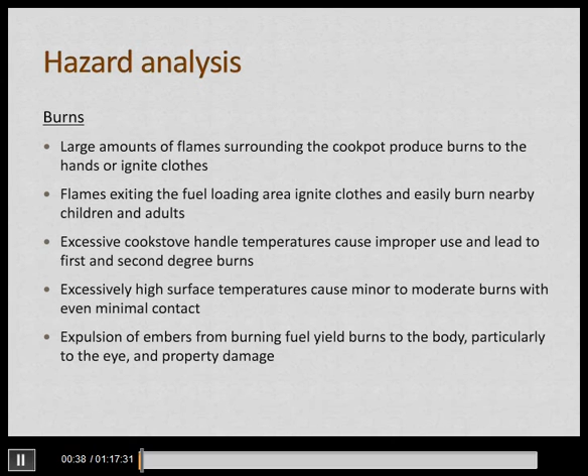And on the next one, scalds. The first one is if there are handles or protrusions around the cooking surface that stick up. If you pick up the pot and go to move it, it hits those little ledges, and then you spill the pot, possibly on yourself or someone near.

Also quite obvious is the second one under scalds, which is that stoves have to maintain stability. If they're not stable, it could spill out fuel, which leads to some of the loss of property as well.

I'll skip down to loss of property for a moment. Looking at large amounts of heat transfer to surroundings, in some situations if the stove is placed too close to the wall, or if there's a heating unit that starts the fuel before you put it into the actual cooking stove, it can ignite the surrounding combustibles or the home.

Not that uncommon, actually. I had a family member, even in the United States, who lost their home from a wood-burning stove inside, fully enclosed, but the stove was so hot it ignited the dry wood in the floor underneath. Two hours later, the entire house was gone. So this is not an uncommon problem, and we really need to look for that.

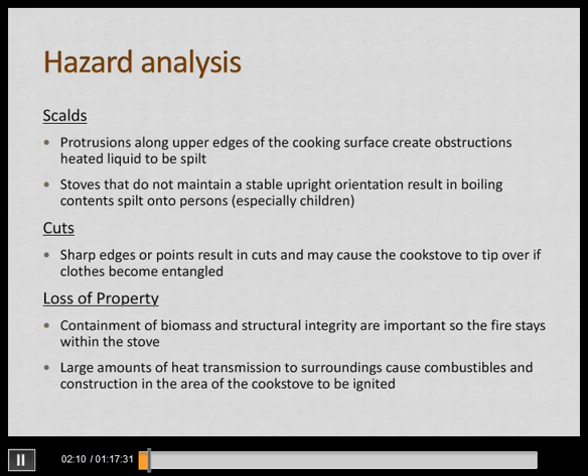The other one, in terms of cuts, is sharp edges or points that can cause lacerations or cuts. If clothing catches on those sharp edges, it can easily tip the cook stove over.

After looking at these hazards, I wanted to see how the available standards represent them. We reviewed standards from a few different organizations, and the ones presented on the right—ISO, ANSI, and Underwriters Laboratories—are the ones I focused on mainly when developing the set of 10 safety guidelines and metrics I'll talk about today. But this is the set.

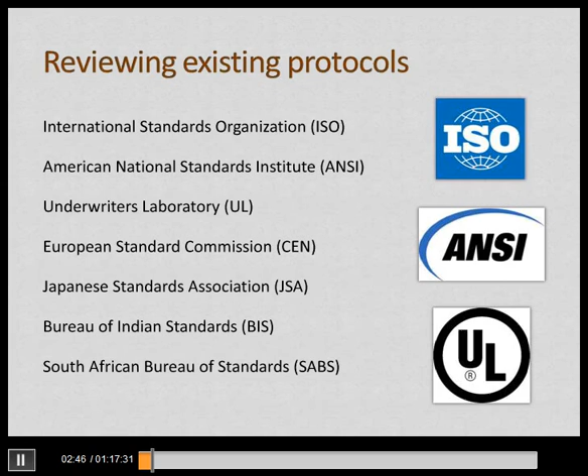If you want to look at the larger set of what I looked through, I don't expect everyone to be able to read this, but feel free to take a screen capture, as Rainey mentioned it's going to be online later with a recording. These are 30 different stove safety protocols, or protocols on stoves that have safety included. A lot of them also have durability, because those two considerations often go hand in hand when developing protocols.

If I was doing this in 2004, there are many of these. I updated this last time about 2 years ago, and these 4 right here have been updated since then, these 3 as well, these 2, and going on up. A lot of these have been developed, and you'd expect that with the safety protocol I'll talk about today.

Then Rainey will have some questions about the way forward. Is there anything missing? Should we have testing equipment kits that we can send people, etc.? That's kind of one of the ways forward.

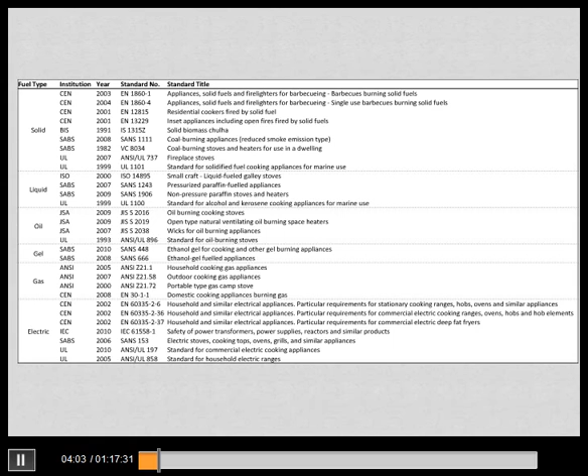So that'd be perfect. Let's get on to the actual safety procedures that I developed. Why tiers? Why are we not just saying a stove is safe or a stove isn't safe? Like I was mentioning earlier...

Let's see, I'm going to show presenters my cursor.

Thanks, Laura. So what we see is that the incremental rating system is good for showing improvement.

But then there's also the all-or-none approach - if we don't have an organization saying this needs to happen at this level or you're not allowed to sell stoves, there's nothing like that in many countries. So that's another reason for the tiers - so people can say, well, my stove is at a fair rating, and a consumer sees a stove right next to it at a good rating, and thinks, if it's safer, it's probably good to purchase, good to fund, and a better design. So this is one of the reasons to go there.

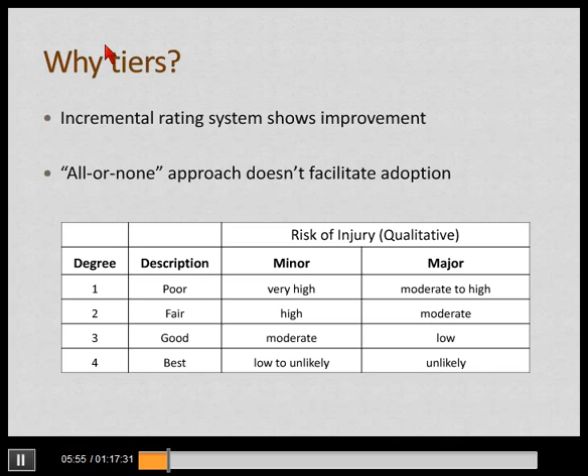At this time, and still today, there's very little data on the likelihood or risk of injury. So 10 years ago we talked about looking at this qualitatively, and that's what I did. If I looked at the possibility of a minor injury versus a major injury, this is how it ranked. For a minor injury, a poor rating would be if it was very likely to occur, like a small cut on your hand. But for a major injury, such as what would happen from a skirt fire, even a moderate chance of that happening is very bad, so that gives a poor rating. You can see how that goes down to the best rating. Many of the procedures I'll show you in the next several slides use these four ratings.

In establishing the tiers, there are a couple things to consider. First, we need a reference point - where do we put the line in the sand and work from there? The line in the sand we chose was the ANSI standard. That was identified and proposed to Ethos, and everyone agreed it was a good idea to move forward with.

The ANSI standard is used as a reference point, placed between the good and best ratings. It's not placed at the top of the best rating because there isn't really a maximum amount of safety you can have. What's available is the American National Standards Institute's minimum safety standards, which correspond to the same metrics as other standards throughout the world. If everyone agrees on that, it makes sense to put the peg there and work up and down from it, developing those through collaborative discussion with stove community experts.

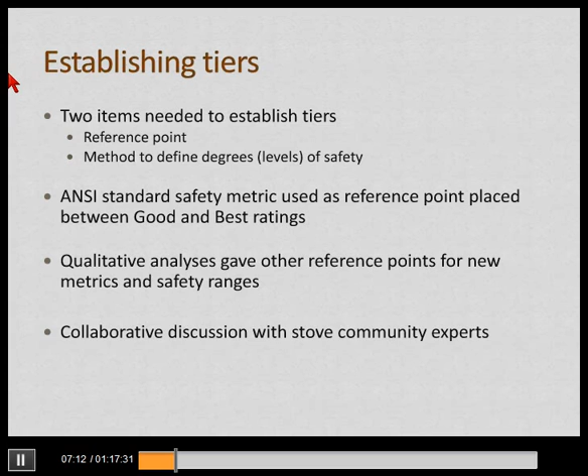Looking at the equipment required, the goal was to not require $10,000 or $20,000 US to complete a test - we wanted to make it simple and easy to use. You can do it in 90 minutes, and a kit for this testing costs around $200 max, most of which comes from the infrared thermocouple I'll mention in a second. You'll need the cooking equipment, and the testing equipment is fairly simple: a tape measure, a ruler, a calculator for simple mathematics, cloth or rag - I'll get to that in the first test - and a piece of chalk, because you'll be making grids on the stove, floor, and wall, then testing the temperature of those.

You'll also need a thermometer to measure air temperature, and an infrared thermocouple to measure surface temperature. If you haven't used one of these devices, it's extremely slick - instead of taking a traditional thermocouple and tacking it to various points on the cook stove, which is expensive and more cumbersome and time-consuming, and also requires a reader to do all this.

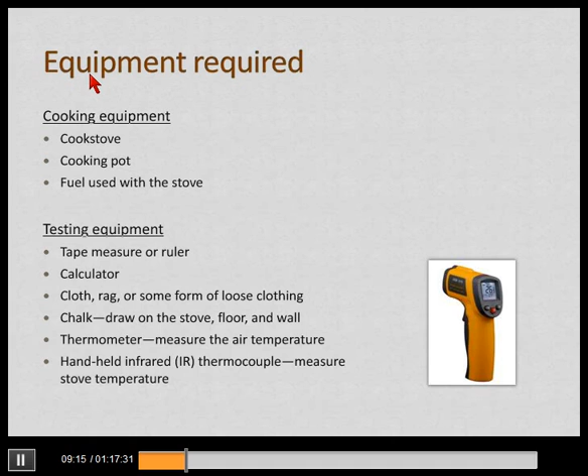With an infrared thermocouple, if you haven't used one, it's basically a little gun with an infrared sensor that measures the temperature of a surface by the amount of infrared being released or radiated. Thermal energy from the surface is radiated as ultraviolet light, visible light, and infrared - infrared being the largest of those wavelengths. The device reads the infrared wavelength, converts it through a thermoelectric process into a small electrical difference, and that difference translates into the temperature reading on the back. It's really easy, so you can do quick tests at all the points on the stove using one of these quite quickly.

Chimney shielding. So if the stove is safe from touching, what about the chimney? And is the chimney hot? If your stove is polluting, a chimney is probably a good idea, or improve the combustion. But this test focuses just on the temperature of the chimney. It's not saying that you should or should not have a chimney. It's only saying that if you do, you need to check the temperature of it, because people can easily touch it. And I've seen in many circumstances that there's actually a grate or some type of small wire with very small holes put around it that doesn't allow people to actually touch the chimney. I've seen that several times.

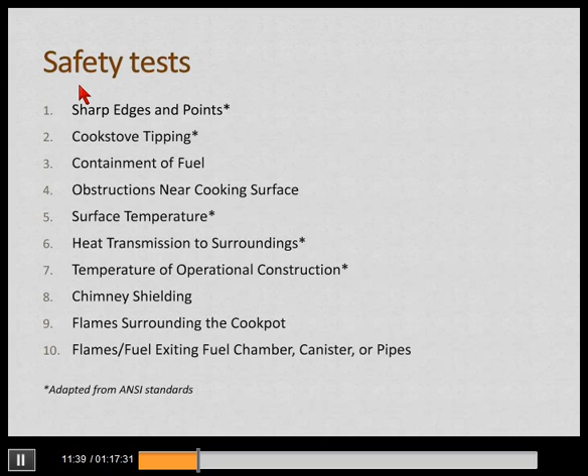And then you have flames surrounding the cookpot, and then the flames exiting the fuel chamber, canister, or pipes. This last one was kind of a bit of a reach back when I was just developing these for biomass cook stoves. But I had people ask, what happens for solar stoves, and what happens for gas stoves, and methanol stoves, and ethanol stoves, et cetera. So this one was just a brief attempt to say that if you have fire coming out of any unexpected region of your stove, that's probably really, really bad. And so that's what this seeks to express and then rate for safety.

So in terms of the first test, on sharp edges and points, and each one of these tests that I'm going to go through has 4 different basic elements: one is a guideline, then equipment, procedure, and then the metric. On the guideline, the reason I'm not just saying sharp edges and points and going right into equipment or procedures, is that if people just want to read through it for informative purposes, or if they don't have equipment to do the tests, they can still read the guideline and educate themselves on what are the dangers.

So guideline: exterior surfaces should be smooth and not cut flesh. Okay, that makes sense. So let's round off those sharp edges, let's use slightly different construction in this place, and let's go forward. Now, I said this was slightly adapted from the ANSI standard, and this really just means the ANSI standard said you shouldn't have sharp points, but they worded it in a way, and this isn't uncommon, that the cooking device should have quality workmanship — that's not verbatim, but that's the gist of the actual wording in the standard — and that all fasteners should be secured, etc. And that's really hard workmanship to translate across languages, across people with different backgrounds.

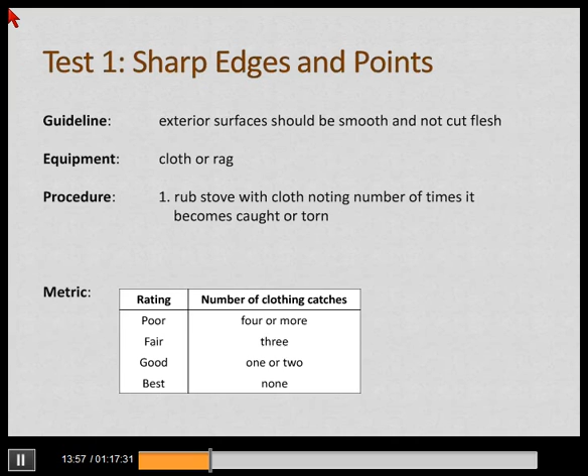Moving on to test 2. It looks like the PowerPoint didn't translate quite well if you look down there in the lower left. Hopefully that resolves itself later on.

Looking at cook stove tipping, the guideline is cook stoves should not be easily overturned. This matters especially with larger cook stoves so they don't fall on anyone, to prevent scalds from pots on top, and because burning embers inside the stove can fall out and start house fires or skirt fires.

The equipment is relatively simple: you need a tape measure, ruler, and a calculator. The procedure is shown in this diagram. You measure the height when the stove is not being tipped, and I always recommend measuring the highest point on the stove for more accurate measurements when you actually go to tip it.

When you go to tip, the small h ends up slightly less than the large H. ANSI and other standards look at this point, and if you go straight up, that creates an angle of 4, 5, 6, 10 degrees. Then they mention that given a static force of 50 pounds in this direction, the stove should not tilt more than a certain amount of degrees.

I'm like, that's interesting, but how many people actually have force gauges and can go through and do that? And you might not even have a calculator that can do trigonometry to calculate the angle.

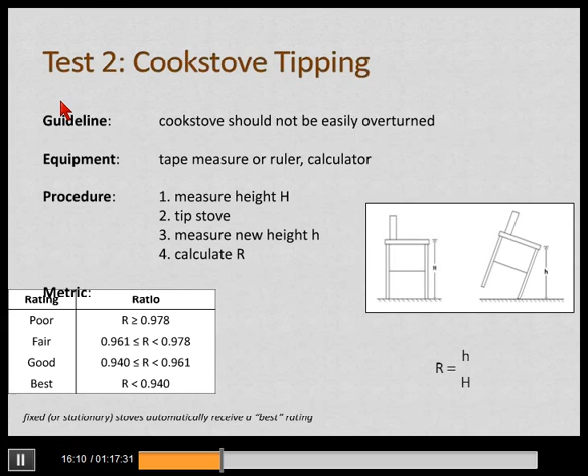One thing to note is that some cooking stoves are fixed or stationary, and since those are immobile, they receive the best rating because they can't actually tip. Things are back in order now, so hopefully that was just an issue with that one slide.

On the next test, containment of fuel. The guideline is that burning fuel should have little chance of exiting the stove, for obvious reasons we talked about. The equipment is simple: place a pot on the stove, and then approximate the area through which the fuel can be seen.

One way to do that is to take a piece of paper and cut it out to the size that, on this cooking stove, would match the visible opening. That's the area through which you can visually see the combustion chamber, plus some additional space. Once you have that, you approximate the area using triangles, circles, and squares, and sum it up to get the exposed area.

So obviously, if there's less area exposed to see the combustion chamber, there's less area exposed for embers to be expelled from it. That's the rationale and intent behind this test.

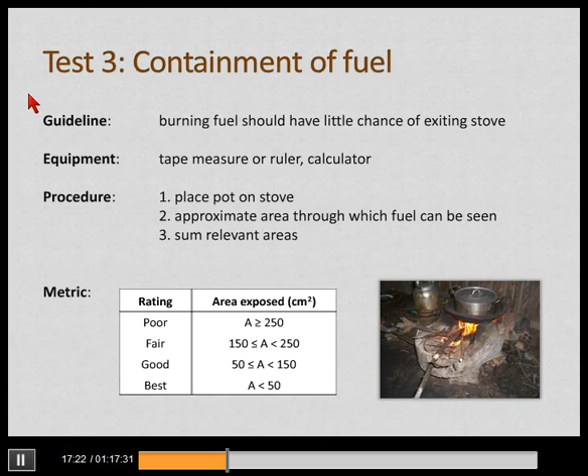Moving on to test 4, obstructions near the cooking surface. This deals with prevention of scalds, or even if your stove is lightweight and you go to move a heavy pot off it and it gets caught in some way, it could tip over the cooking stove, causing the same issue of spilling burning embers onto the ground or onto skirts. So the general guideline is the area surrounding the cooking surface should be flat.

The procedure is to measure the height of the obstructions surrounding the cooking surface.

If there's several obstructions and they don't have the same height, we're going to use the largest height in the rating, because we want to understand the worst possible scenario. So if one side is 5 centimeters high and the other side of the stove is 2 centimeters high, we'll use that 5 centimeters, and that stove would get a poor rating.

If there's very little obstruction and the cooking stove is very flat, like a griddle surface with nothing along the outside, it's very unlikely a person is going to move a pot or cooking vessel off the griddle, hit an obstruction, and spill the food. There are a few exceptions, one we talked about earlier in test 2: if it's an immobile stove, it can't tip, so it receives a best rating.

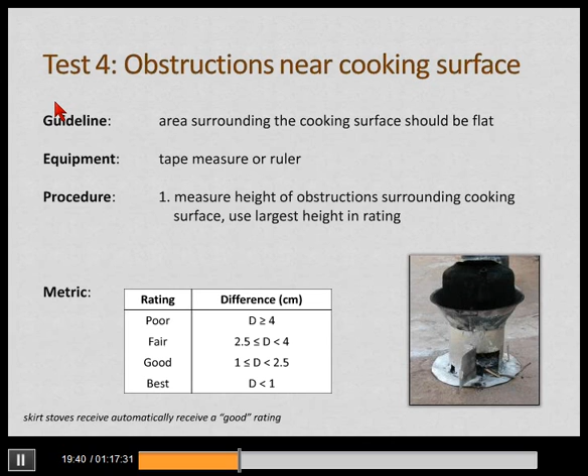There was some discussion at Ethos when I put this forward. I recommended that skirt stoves, where the pot is meant to be rested down but people need to pull the pot out, and that skirt is likely going to be over 4 centimeters, but is that really poor? Probably not. So I proposed calling it a good rating instead of best, because there's still a chance the stove could tip over if people didn't fully pull the pot out. But since the stove is designed that way for heat transfer purposes, and there are reasons for that, we call it a good rating. People understood that and agreed, and we moved forward with this.

Going on to step 5, steps 5, 6, and 7 are completed with the stove actually cooking and operating, whereas steps 1, 2, 3, and 4 were completed before the stove was ignited.

These have to do with the temperature of the cooking stove, the surface temperatures around it, as well as the temperature of the operational construction of the device itself. The simple guideline is that surfaces should not burn when touched. The equipment needed is chalk, a thermometer, and the infrared thermocouple I mentioned.

The next 3 tests use that infrared thermocouple. If an entire test kit is in the range of $150 to $200, that thermocouple will be about 75% of that cost, so it might cost you $125 to $150 to get that device. It's the most expensive item, but it makes testing very easy and quick for these next 3 tests.

The procedure is that if you look at a stove, it's likely not going to have a uniform surface temperature across the entire cooking device. That makes sense — it's going to be hotter near the combustion chamber, hotter near the top of the stove, etc. If it has legs, it's probably not going to be hot at all there, at least I'd hope not.

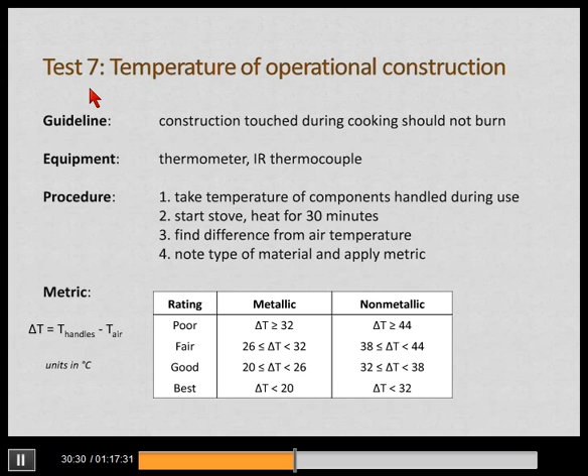Now, what's interesting is that it's not a simple brush against the stove - let me go back. If you see metallic 32 and 20, that's the poor and the best. Let me go back 2 slides. There we go - back 2 slides, and if you see the metallic is 50 and 38.

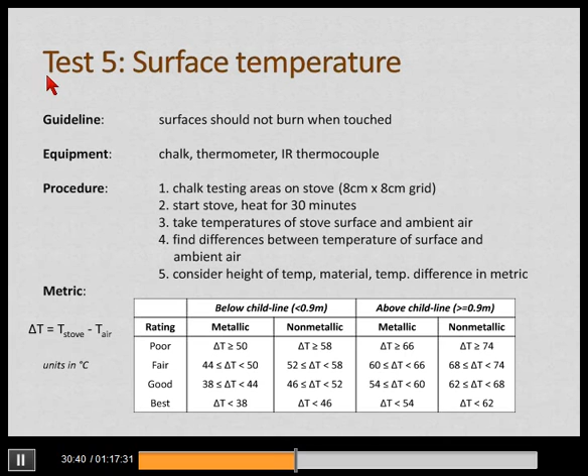This allows a higher temperature if you're just going to brush against the stove. But I'm going to go forward now. So if I go back to test 7, if you're going to be holding onto the handle for multiple seconds, you're going to get more and more heat to go into your hand. And as you get more heat into your hand, that heat needs to go somewhere. So this says you can hold onto the handle for a period of time and it's going to be fine. That's really what this is getting to.

So if there's a lower temperature difference - remembering that heat transfer occurs based on the difference in temperature between 2 surfaces, and since we're talking about conduction, the difference in temperature between 2 surfaces, the thermal conductivity between both of them, and some thermal resistance terms, etc., which aren't particularly important in this discussion - those are the primary movers.

If you're holding onto a handle and you hold it for longer and longer, at some point it might get hot in your hand and you pull your hand away. But for the time that you need to use it, this is okay.

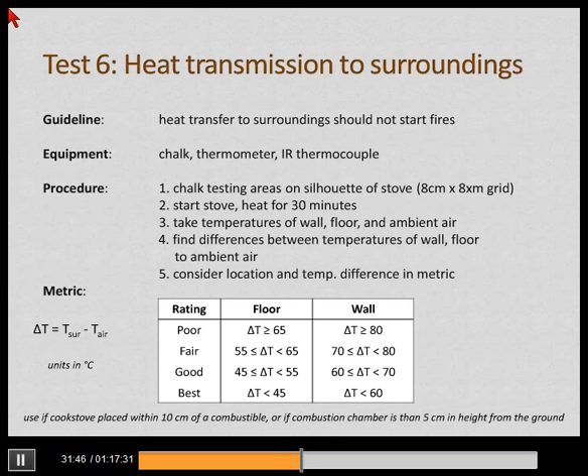So those are the three tests that have to do with temperature when the cook stove is operating.

Chimney shielding is another test. This needs to be done with the cook stove operating if you actually have a chimney. This is Richard Grinnell from Helps International, who I mentioned earlier. If you have a stove with a chimney made of ceramic, maybe it's not as hot on the outside since the temperature isn't as much. But if it's metal, maybe it is pretty hot.

If you look at the temperature of the chimney and it's really hot, that's going to give you a poor reading on the temperature metric. You might say, although the temperature of that surface is hot, we can put a grate around it or some type of shielding to prevent people from touching it. Although your chimney is hot, you could have a grate with a really small hole where people can't stick their hands through, or shielding they can't get through. As long as they cannot touch the chimney, that's fine.

I developed this test to account for stoves doing that. I saw several stoves with high surface temperatures on the chimney, and through discussion they ended up putting shielding along the length of the chimney.

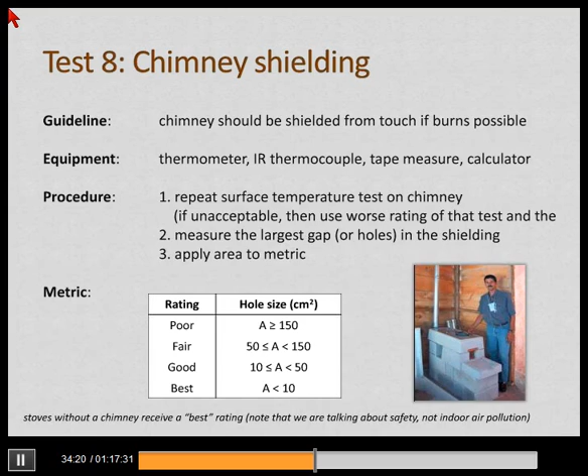The next test, getting to the last two, is flames surrounding the cookpot. This is a picture I took, I think in Mali. If you have flames all around the cookpot, all the way up to the top, you're going to get your hands burned, or possibly your clothing, when reaching for the pot or stirring the ingredients, or your clothing could catch on fire. This is just a metric to rate that.

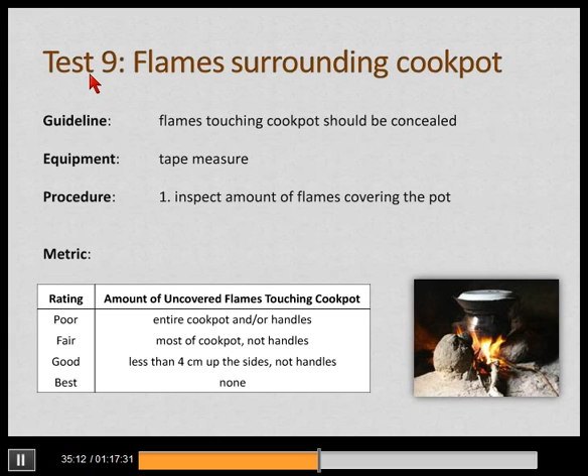Obviously, if there are no flames in the region where you'll be touching the pot or getting your hands near it, that's great. But it gets worse the greater the amount of flames on the pot. I'm sure many people have seen this—it looks like a moderate amount of flames, but I've seen flames all the way over the pot, as high as here. If that's the case, I don't even know how you'd pick up that pot. That's dangerous, and we need to account for it.

The last one is flames exiting the fuel chamber, canister, or pipes. For a biomass cook stove, this is another test. The last one measured how much flames surround the pot; this one measures how much flames exit the fuel loading chamber—that's the goal of this test. We want to measure both because they're not necessarily inclusive of one another; they're separate tests.

This is an attempt I had made to adapt to some of the people that wanted testing for gas stoves, but more importantly, the liquid fuel stoves. If you have a canister of liquid fuel and all of a sudden that canister is on fire, well, that's obviously really bad. So this rating just has two levels: poor if your stove's on fire where it shouldn't be, and best if it's in normal operating conditions. I would still say there are so many more tests needed for electric, gas, and liquid cooking stoves that this doesn't fully encompass everything that's needed.

But 10 years ago, the sentiment was this is a start in the right direction, and we'll work toward that later. That was actually part of the IWA agreement, recognizing that these tests get us a long way toward biomass stove safety testing, but we need to expand this thinking to other cook stoves now that we have a reference point of what's necessary, and also some example procedures by which we can adapt, cater, and expand.

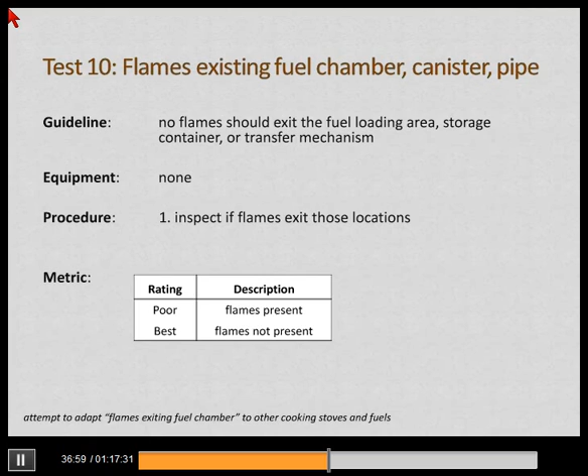So these are the 10 tests. Once you have the 10 tests, and there are 4 levels throughout, if you took 10 times 4, the maximum rating you could get is 40. Or the lowest rating, if you got a 1 for each of these, would be 10.

Now in looking at this, through discussion with people, what I found is that's great, but we also recognize that the tests, or the hazards themselves, have a different amount of bodily harm to the people using the cooking device. For instance, sharp edges and points—if you get a small cut on your hand, maybe you need a Band-Aid. There could be issues with infection, and that's something you want to prevent. But that is less significant than having a pot of scalding water poured on you, such as from a cook stove tipping, or heat transmission to surroundings starting a house on fire, versus just getting a burn on your hand from surface temperature. These are not meant to say cook stove tipping is twice as bad as sharp edges and points—these are just relative metrics by which we can understand how this relates to an overall sum, which gets us to an easy number that's easy to quantify and talk to people about.

So if you take these 10 tests, the average value between these is actually 2.5. If you take all of these and equate them—so a maximum of 40 times 2.5—you get a maximum rating of 100 points. With 10 tests, each rated 1 through 4, you multiply by each of these weights, and you'll get a maximum rating of 100, and a lowest rating of 25.

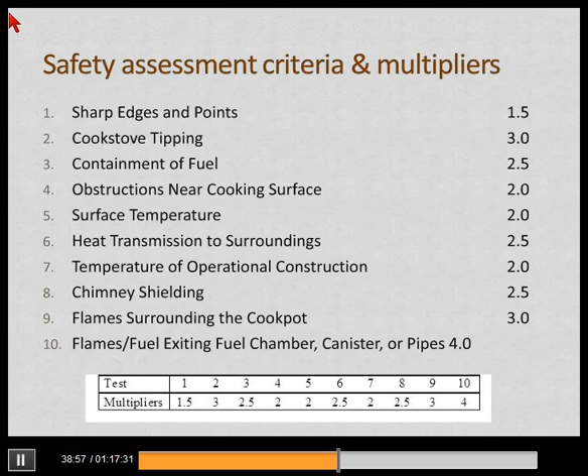And that worked out pretty well. What's interesting is that initially I tested about 15 biomass cook stoves with these procedures, and I got tests from other people as well. Over the last 10 years, we've been able to expand that to 50 and 100 stoves and get more information on where stoves actually rank. It was really informative that through the IWA process, and before that with the Lima consensus, there was more discussion about how for all of the tests—emissions, efficiency, and also safety—we could all use a tiered rating procedure.

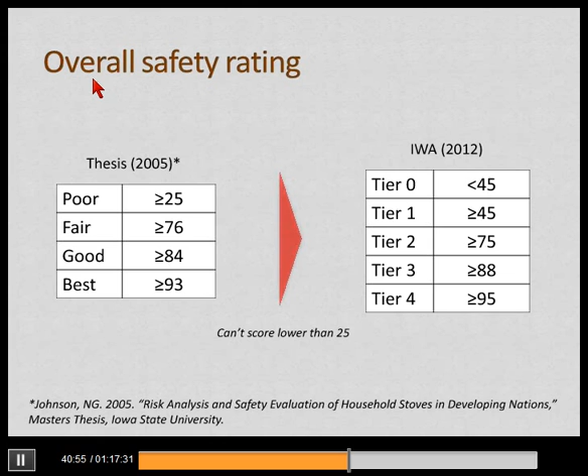This next couple of slides show results from different cookstoves around the world, tested at Iowa State University, the Engines and Energy Conversion Lab at Colorado State University, and Aprovecho Research Center in Oregon, plus several other labs that have won grants from the Global Alliance for Clean Cookstoves.

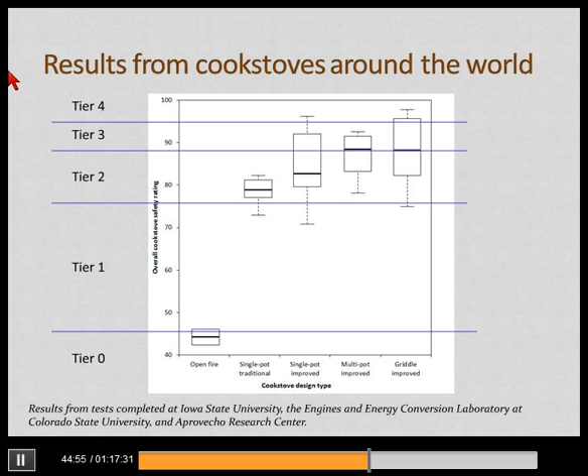And so this is an excellent way to compare cooking devices. Going forward a little bit, benefits of these protocols: there's an aggregate safety metric, so we can say the stove is 80, the stove is 90, the stove is 85, and that can guide consumers as well as funding agencies.

Additionally, the individual 10 safety metrics demonstrate how designers can improve stoves. So if the cook stove is good on another metric, but it tips easily, if they want to bump themselves up to another tier, they know they need to focus on the tipping hazard, for example, expanding the base of their cooking stove so it doesn't tip as easily, or making it heavier on the bottom and less heavy on the top. The goal is also to show that you may not have an added cost by introducing safer technologies, such as by widening the base.

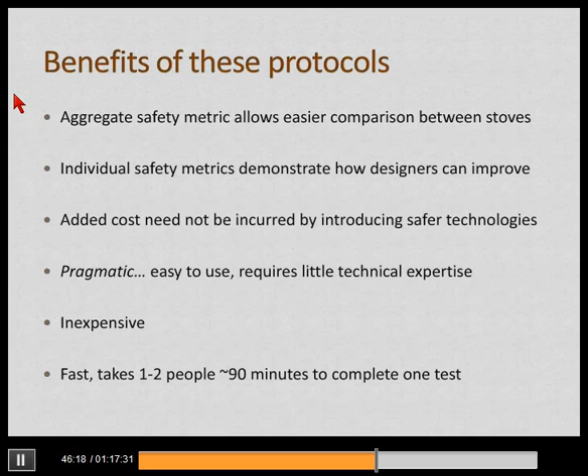In keeping with the goal, I was trying to make these metrics very pragmatic, easy to use, requiring little technical expertise, relatively easy to translate, very low cost, because the goal here is to promote use, not to restrict stove design, stove improvements, stove sales, and benefit to consumers. The goal is to benefit consumers by making it easier to use, pragmatic, low cost, and easy to use. It takes about one to two people about 90 minutes to complete.

So a little bit on the way forward. Where we are today: 10 methods, principally for biomass, focused on handmade stoves, used in over 15 countries. As I was saying, it's accepted in the International Workshop Agreement of the ISO process. My email is going to come up later, but it's currently in review as part of a book chapter, and then it's going to be submitted as a journal article.

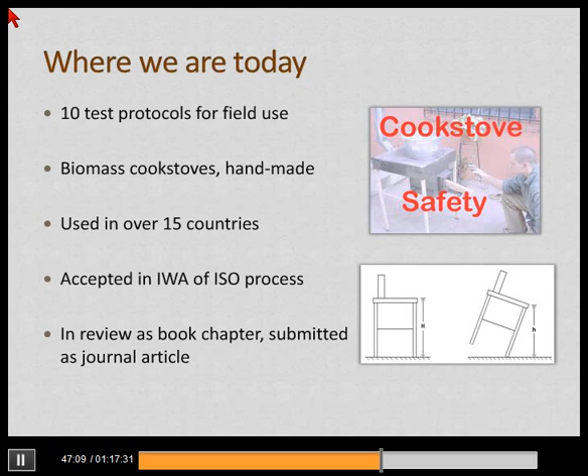In addition to the thesis, if you don't look through the 100 pages, feel free to let me know, send me a note. That has all the background, but it's going to be consolidated into these forms of publication as well, and it's translated into Spanish as well, by some fellow workers in Bolivia. So if you want a copy of that, email me and I'll put you in contact with them, and they would be more than happy to provide that to you.

Obviously, we're not at the end of the line. With stove standards, even though they started in the 1960s in ANSI and ISO, those are still being revised and updated today. Cook stove standards are meant to evolve, which is why they have a year with them. They don't just say this is what it's going to be for all time, as we learn more and technology changes.

And there's a few things here for continued work. Laurel, who we'll talk to shortly, has excellent data entry sheets for these current tests that will allow people to enter data, and she's going to talk more about those, but that's a fantastic start to gather more data and understand stoves throughout the world. We do need additional tests.

After these 10 tests, I went back a few years ago and identified 23 hazards that we need to really look at. One of those includes pinch points, for example, which isn't included. There's also this durability and safety relationship - for example, after a period of thermal cycling, the quality of the stove may degrade, and thereafter may increase the likelihood of the stove falling apart underneath a large static load, which is another test that we need. That's a pretty coupled durability-safety relationship that's going to be interesting to pursue.

Principally for biomass stoves - I had people request how this relates to solar stoves, but there's things that worked well and things that didn't work well, so instead of overreaching with the protocols, I said we're just going to stick to biomass stoves and develop the rest later.

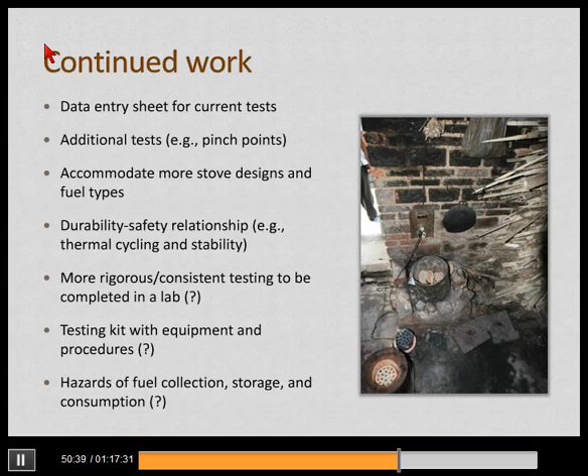Now, these are relatively common. I've actually seen these. I've been in houses when these have started fires, actually in the house, and the house is on fire. I have seen this happen. What happens is these get so hot and they're so near the ground that anything underneath, even if it's just wood—I'm not talking about agricultural waste or splinters, I'm talking like a plank of wood or OSB—if you put these on top of that wood, it will start the wood on fire. And it doesn't need to be in contact. It gets so hot so quickly. So that's a hazard that's definitely not represented that needs to be considered.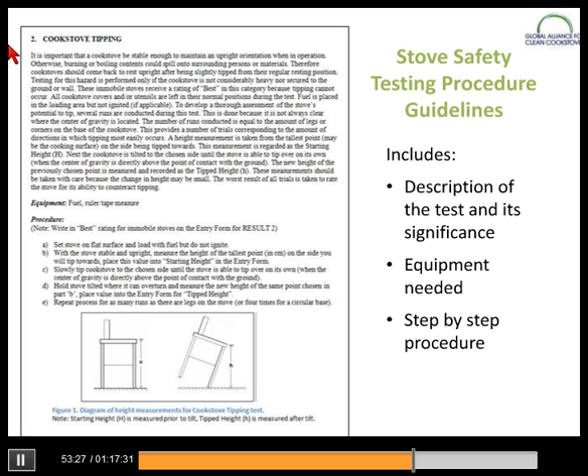We just wanted to share with you all what the tools look like that we're trying to develop here at the Global Alliance for Clean Cook Stoves. I took all of the hard work that Nate did for his thesis, pulling together all the information out there on stove safety testing procedures, and put them together in a couple of easy-to-use documents that could be used in the field. There are two different tools. The first is just this guidelines document, and it would outline how the test would be done, as well as the equipment needed and a step-by-step procedure. There's a few of them that include nice pictures to help show people what they should be looking for. That's for all 10 tests.

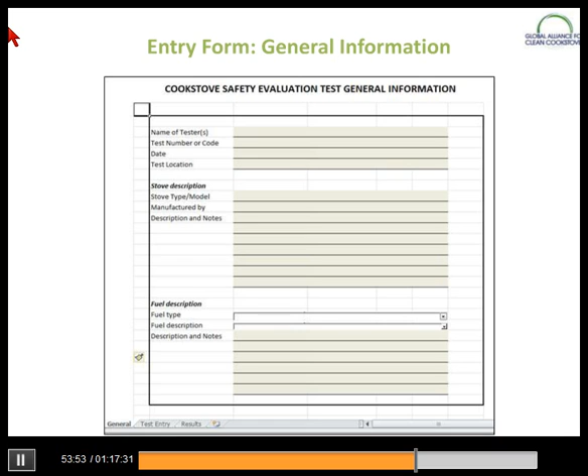And then we also developed this entry form spreadsheet. You can see at the bottom there's just three tabs. The first tab is just the general form for who you are, where you're testing, what stove you're testing, and you can enter all that general information. Then you would click over to the test entry on the second tab, and that would have a place for you to put your measurements for all 10 tests. We developed this with the idea that you wouldn't have to do very many calculations using this spreadsheet.

I've inputted all those formulas that Nate talked about for how you would get a rating based on your measurements. You would just enter in the gray areas here for each test based on the procedures in the guidelines, and then it would automatically come up with a result for each test on the best to poor scale.

From that, the third tab on the Excel spreadsheet would show your results, and this would all be automated. You shouldn't have to plug anything into this form. All of your ratings from the 10 tests would automatically show up here in the second column, multiplied by the different weights Nate talked about, coming up with a value and a total sum, which then could be calculated automatically into the stove rating overall and a safety tier, linked to the IWA ISO standards.

So with that, I hope that's helpful in showing you what we're working on and what it would look like in the field, and we wanted to get your different input and ideas on how this could work with your different experience in the field.

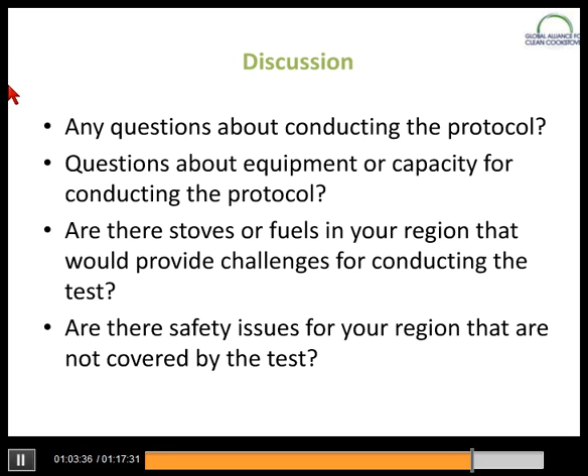We do have a question from Tim Longwell from Zamorano. With chimney stoves, there are some models that have a brick base for the first 25 centimeters above the cooking surface, thus out of reach of children and reduced risk during typical cooking activities. Should this brick base be taken into consideration? Yes, and that brick base, anything that's on the entire stove, including the surfaces surrounding the combustion chamber, etc., as well as the chimney, the entire stove should be tested up to a height of 1.5 meters.

And then depending on if the material changes on the chimney, that's fine, and you'll look at the test and say, well, we're measuring at this height and it's of this material, and that's what will correspond to your end metric rating. But that's a very good question. And I also flip to, Nate, the test entry form that shows the surface temperature section with the below the child line section and above the child line.

Exactly. So over there on the right, as Rainey was mentioning, if the brick material goes up to 0.8 meters, then you still have 0.8 to 0.9 meters that would be below the child line, and so you'd have to measure that metal part as well. So if you have any other questions on it, shoot me a note and I can talk to you a little bit more about it.

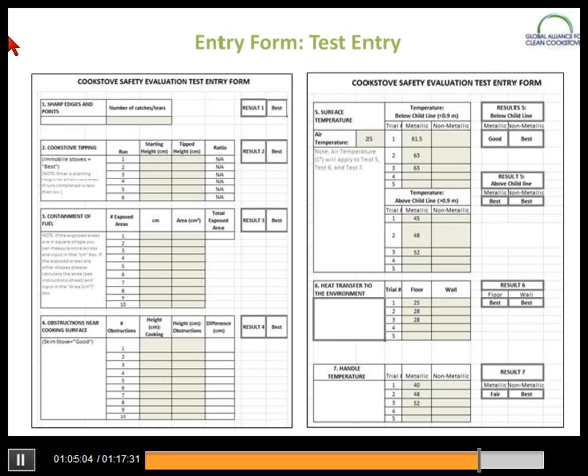It was a bit of both, and the main difference that I noticed was largely just between testers and local people cooking inside the home. What I did notice is that generally the people cooking inside the home use larger fires. That's important to consider, because if the testers are stoking the fires to what they consider reasonable, that may be different than if someone in the household needs to step away for 15 minutes and wants to shove as much wood as possible in there, and then 5 minutes later you have a very large fire. Not saying that's a house fire, but the stove is very, very hot.

That's the biggest difference that I saw. The rest of the test covers it because the stove isn't operating, so there's no difference regardless of who's doing the test. But once you're actually cooking and stoking the fire, that's where I saw the difference, and that's a really good question, Christian.

Yeah, this is Tegeke. Can you hear me? Yes, we can hear you. Please go ahead.

Jackson Tegeke asking: would there be some stoves which would not be considered by the test protocol, because for some elements the containment doesn't apply to charcoal stoves? It's obvious that the flames always get out. So would there be a procedure whereby some tests are exempt?